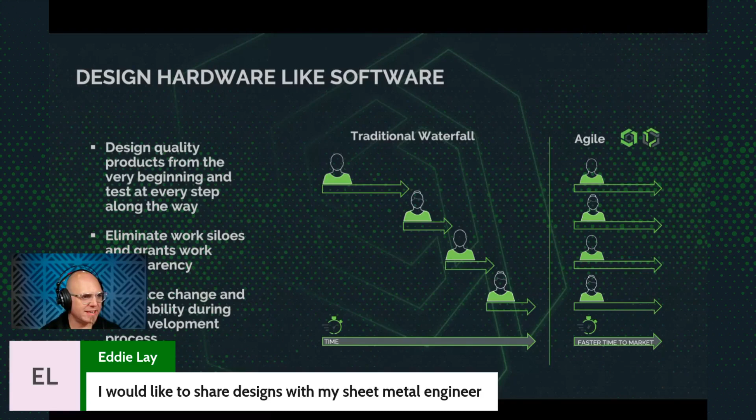So let me swap my screen here so you can see what I'm going to be talking about. One of the questions that came up just now from our new friend Eddie, who is a new Onshape user, was about sharing designs with a sheet metal engineer. These are some things that we'll answer today, and it's all related. Onshape sheet metal is very special, and we rethought how to accomplish sheet metal geometries based on how people interact with sheet metal manufacturing and OEM manufacturers, right?

If this is your first time looking at something like Onshape, I will explain it a little bit. But if you're an Onshape user, customer, longtime customer, you're going to get some good stuff out of this too. But you've probably heard this, right?

This is a trend in engineering and manufacturing: to design hardware like software, because the software industry has done a pretty decent job at keeping control over code and working in parallel paths, because software projects are very large. Think of a large application, or a fancy PlayStation video game. It's probably thousands of engineers writing code to go into those things. So they had to develop really good processes for managing parallel workflows.

Traditionally in the CAD world, it's been very difficult to do really good parallel workflows because of the way file systems are made. So we see people going from this traditional waterfall, passing a baton from one user to another to get work done, because only one person at a time can open a file in that kind of file management, right? If you've been around like me, you remember file servers and things like that. But it's becoming kind of strange to deal in that world. Most people are used to sharing online, like Google Docs and things like that.

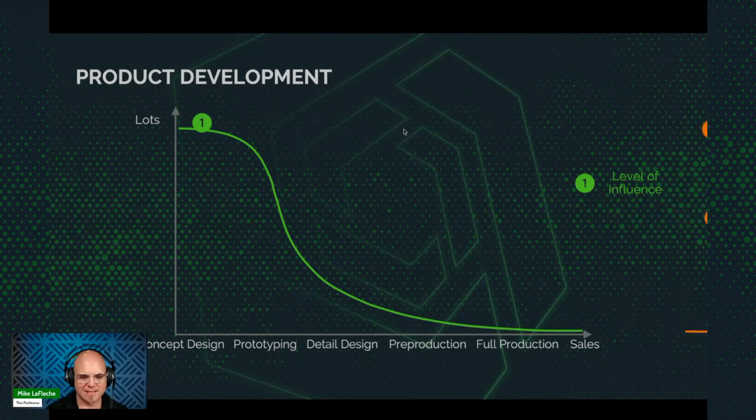That's when you as an engineer have the most influence over the design, right? But the moment it leaves your screen and is shared to somebody else, that's when the level of influence starts to wane, right? And if you find an issue, there's this metric called cost of change, and the cost of change later in the product development process, as you go from concept to prototype to pre-production to sales, gets higher and higher, right? So you want to avoid making changes past that inflection point right here.

But that inflection point is pretty far down the design cycle, right? You're finding those changes, you're making these changes in this middle section. But what if you could front load your design effort so that you'd fail fast, find problems sooner, right?

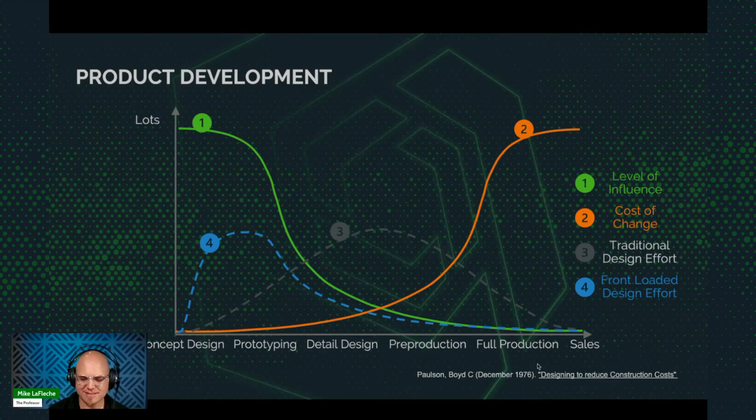And this is not a new concept. The concept of modified agile for hardware design is a new concept, but this thought train of finding problems sooner is not brand new. This is from Boyd Paulson back in December 1976, designing to reduce construction costs, and you can find that online. So how do Onshape customers produce sheet metal, right?

I'll do a quick explainer about Onshape here as I get started, and we'll get into the dirty details. There are many workflows to design products, right? I'm just picking on one for the straw man for our presentation here. There are many workflows where you could go from flat pattern to folded shape to flat pattern to get these things manufactured. But let's just pretend that I'm an OEM manufacturer producing a product.

In this case, we're going to be working on this shape here, this mobile generator chassis, which is made of many pieces of sheet metal fastened together, whether they're welded or fastened with bolts or PEM nuts or whatever it is. So as the OEM product designer making that chassis, I know a certain amount, but I don't know everything. I need to communicate with my sheet metal supplier because they have equipment.

They're going to be using certain gauge sheet metal, certain types of tooling and bend and air presses, things like that I might not be familiar with. And they might need to help me adjust my design to suit quick, accurate and cost-effective manufacturing, right? So finding that out sooner is going to be a big help. I can tell you a million stories, some personal, from my design days back in the mid 90s, when I was doing that cement mixer I was talking about.

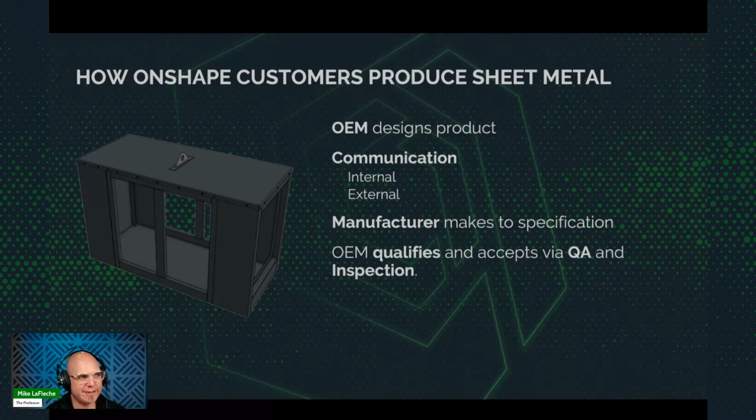So that internal and external communication, we'll talk about that. The manufacturer will then manufacture it and send it back for you to qualify through an inspection process, right? So what we're going to try to do on this chart is take that arrow and move it up, and all that movement is savings. There's other software in our product family for supply chain interaction called Arena PLM. We're not going to talk about that much today, but that's also a partner for supply chain, quality and inspection.

So let's start with Onshape and CAD, right? You're here to see a CAD demo, I'm sure, and I'm going to give you one. Know that Onshape is a full-featured CAD system with feature-based parametric modeling, similar to what you would see in Creo from PTC, SolidWorks, or Inventor from Autodesk. It's designed with that parametric way of thinking, where you put together parts and assemblies and make drawings of those parts and assemblies.

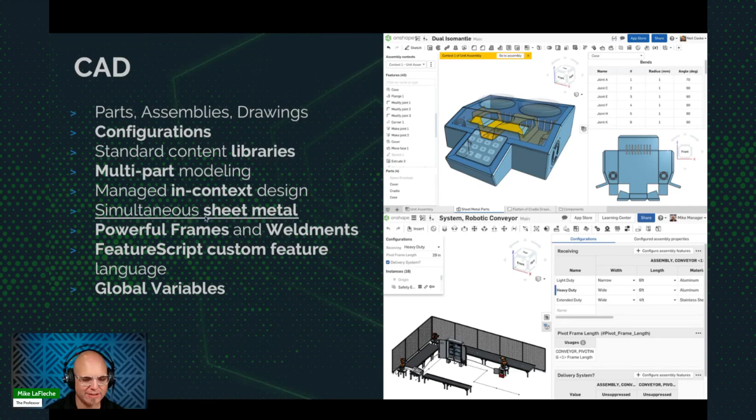Onshape can create configurable data for variant design. We have libraries, and we work with multi-part modeling, which works really well with sheet metal, frames, and weldments, and I'm going to go right into it now. So let me stop sharing that screen, and I will present another screen for you. Okay.

So here is my Onshape window, and maybe I'll just go full window here so you don't see me talking, just for a second, so you can see the full experience. I've signed into Onshape here as a user, as the manager right here. So when you sign in to Onshape, you sign in as a user. Essentially, it looks like this when you sign in. You sign in with your email address and password. Nothing to install. Full SaaS.

There's no CAD file that ever goes to your computer. You can always export data. You can release data, securely share your data, but there's nothing to install and there are no CAD files that you're managing on your computer. And that enables this finding problems sooner workflow, as you'll see. And when you work in Onshape, you create these things called documents. This is a document right here. This is not the focus of this particular webinar.

I'm going to create that mobile generator shape as you saw before, but this is an Onshape assembly made of released parts. Here is an Onshape part studio, which is the definition of the parts, right? How I'm making it, sheet metal parts, the flat patterns. You're going to see today in Onshape, this is why we call it simultaneous sheet metal. And I'm going to explain our thought process as to why we did it this way. But this hinge, for example, is made of several parts, 8 parts, as you can see right here in this one feature tree with 63 features.

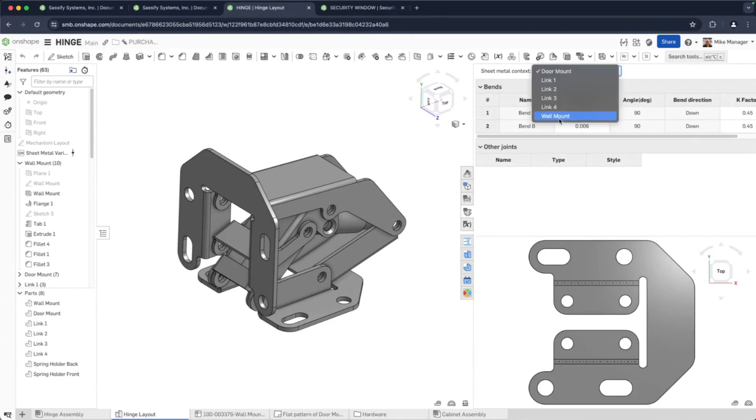So think about that. If you've come from another CAD system like SolidWorks or something like that, we have a feature tree, and all those features are creating 8 parts. I didn't have to save those out as separate files and manage and juggle file references. Here are the flat patterns for each of the components, as well as a bend table showing you the bend calculation and the bend radius as well.

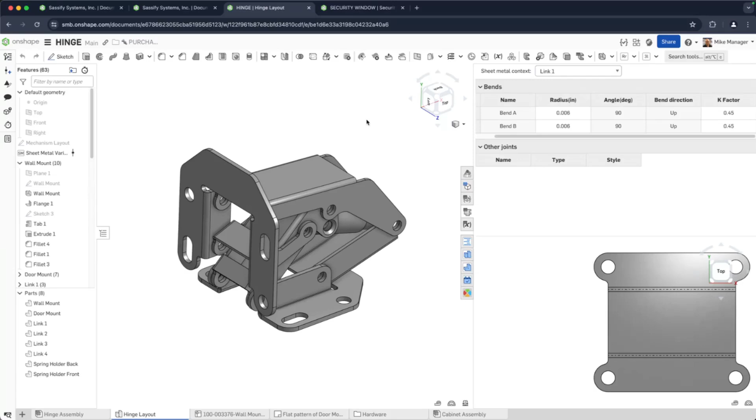So this is simultaneous because you're seeing 3 views of the Onshape data, the flat, folded, and bend table state in 3D. As you make changes, it changes in all the places. And of course, you'd be able to export that for manufacturing as a DXF with the naming that you're looking for. And I'll talk about this as we go forward. So this is just a little preview. All right.

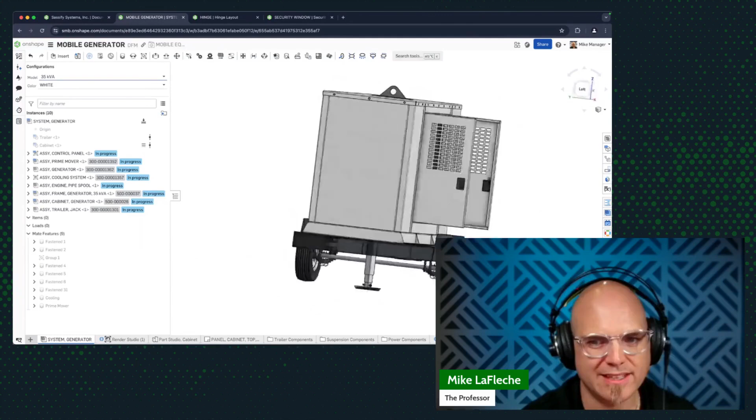So let's get into how we would construct this mobile generator right here. And I'm going to pop this open right now from scratch. It's a full product. I'm going to open it at a certain configurable size, right? This is an Onshape assembly with configuration data. And this is something I just kind of measured up, one of these mobile generators that you'd see at a construction site or something like that. There's a nice chassis frame here, but of course I saw a whole bunch of sheet metal on this and I thought it would be a great example to show how the Onshape sheet metal works.

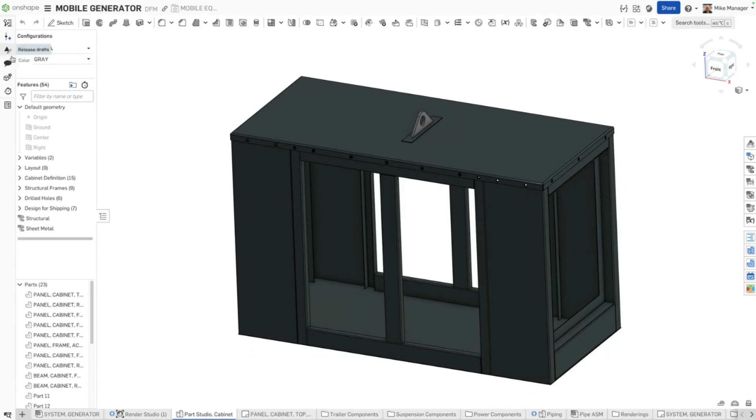So let me just go back to full screen here, so we get the biggest window possible. So when we look at this design, there's a lot of parts that interact with one another here in Onshape, right? In the CAD model. So wouldn't it be nice if we could design these parts together in a way that's performant and works for downstream operations, okay? So if we go to what we call a part studio, you can see this cabinet. I have 54 features and 23 parts.

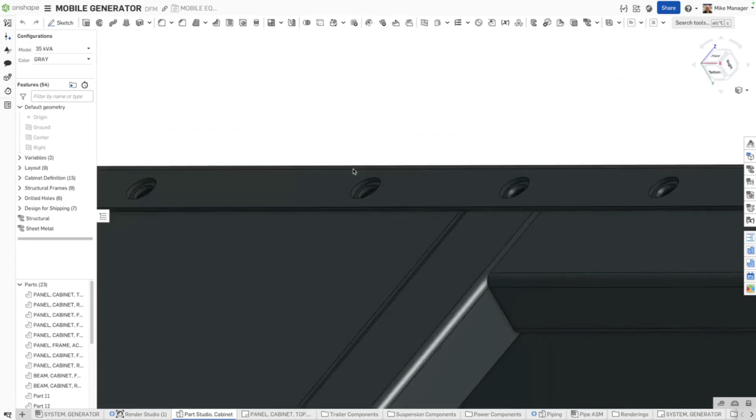This is probably the upper limit of what I would do in a single part studio for constructing a whole bunch of parts. And it's because these are the parts that are related. I'm designing them together because they're just like peanut butter and jelly. They need to go together. They need to be designed together, work together. There's going to be some holes, like some counterbored holes in here that go through here. All right. So let's try building something like this.

And I'm not going to do the whole thing here in one session, but I want to give you my thought process on how to build something like this and how I would go about doing this. And the first thing I would do is to create a layout like this. And I'm going to start in a brand new document.

I'll get out of full screen here. I'm just in Chrome here in my browser, and I'm going to hit the Onshape logo holding the Command key because I'm on a Mac. But if you were on a Windows machine, you could hit the Control key. That brings me right back to my main page, and I'm going to create something called a new document. And I'll just call it the chassis, right?

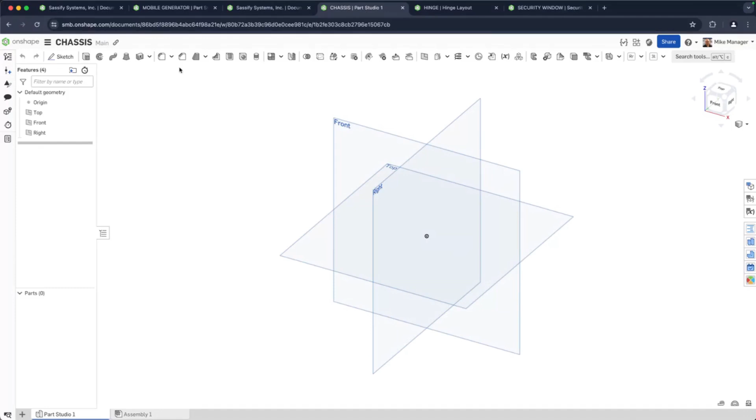So you see right away, I have a brand new blank document. It doesn't ask me if it's a sheet metal part or a weld or assembly or anything. It's giving you a Part Studio and an assembly and a document that you can start with. I start with the Part Studio, I sketch a shape out, right? And I give it the size.

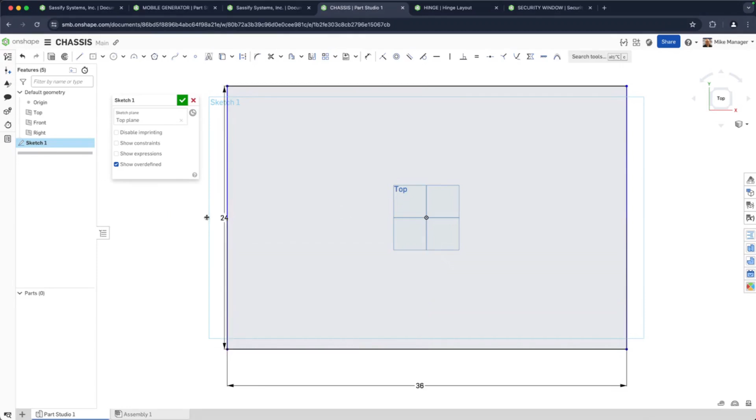How big is this? I'm going to say it's 3 feet in that direction and 2 feet in that direction. It's units aware, of course. You can type in those units. I'm working in millimeters, so I'll just switch that to inches just for this. And if I went back into that sketch, you'd see it's 36 by 24, right? So we have this basic shape here in place. It's a parametric sketch. We could locate the center of that right on the origin, and I have a shape.

And how should I make this, right? That's the next thing that I want to do. There's several ways of working in sheet metal in Onshape. And the first thing I'm going to ask myself here is, should I make it with the extrude feature, convert, or thicken feature? So I'm taking almost a fourth approach here. Let me just start basic, right?

Here are the sheet metal tools in Onshape, right here. And the first button is where you start. You tell it that you want to create a sheet metal model. And this is the question: extrude, convert, or thicken, right? What convert does is it takes an existing solid body and it will help you find all the faces. Great for complex shapes.

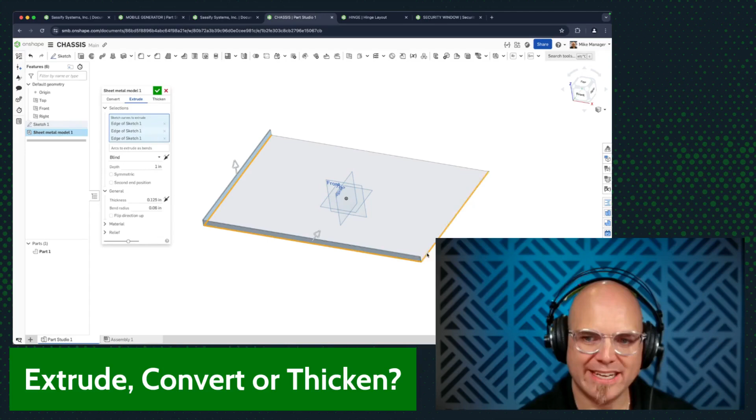Extrude is kind of like the traditional method if you've used any other kind of CAD that has sheet metal in it. You can see that I just picked 3 edges and I just pulled that out, right there at 1 inch. It's asking for a bend radius and a thickness for the material gauge, and the bend radius for your tooling equipment. The thicken option is like taking any face and thickening it. So you can see I'm just taking that flat and thickening it to the thickness.

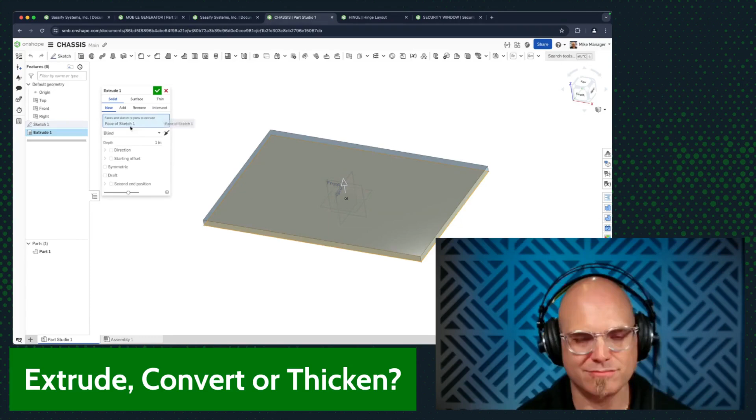The way I'm going to go about this is, if you remember back on this generator right here, we have all these different parts coming into it. I could actually kind of paint on some sketches on here. So let's just go back to that chassis, and I'll just do a normal extrusion like you would find in any other CAD. I'll just do a 24-inch box for the height. And this part right here was generated, and I'm going to call that the reference, just to know that I'm not really going to use this as a full part, but I have this shape as a reference.

And remember, I have those doors and other things I want to kind of peel off. So I'm going to draw a line here, right? And I need to dimension it, so I'll hit the letter D on my keyboard and say it's a 2-inch offset that I'm going to have that goes around this part. And then maybe I know I have a rectangular shape, something like this. I could always center these things too. So there's that center point right here. If I wanted to utilize that, I might just drop in a center line.

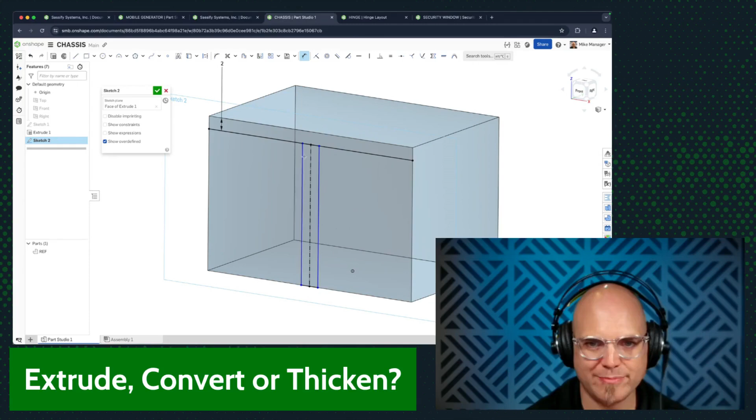Onshape has a keyboard shortcut. So I'm just going to hit the letter Q to turn that into a center line. And then I'm going to make these symmetrical. And there's the letter S on your keyboard. This is a pop-up toolbar, so I have a bunch of my shortcuts on that S key, so I can just quickly get to that. So I'll go to that shortcut toolbar quite a bit. So if you see that pop up, I'm just hitting the letter S on my keyboard. All right, so you see I'm starting to build out a sketch of the front, and I'm just going to rename it front.

So I have the extrude, I have the front. Now what, right? Now, I know that I have a cutout here, cutout here. You see it's highlighting these regions for me automatically. So now I have places where I can start making sheet metal parts. I'll do a sheet metal model on the top, and I will thicken that top shape. You can tell if you want to go up or down, right? And I'll take 1/8 of an inch. Now, I'm going to call this out. It's kind of a controversial thing. Let me just hide my video here so you can see what I'm showing you a little bit better.

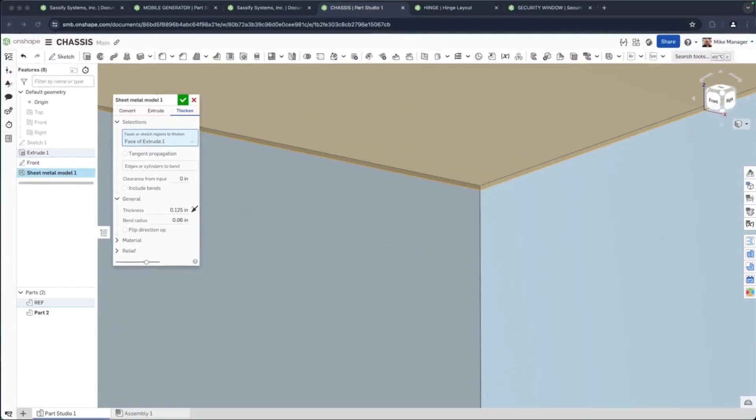And if we zoom in over here, to this area here, you can see it's flipping up and down. And this thickness right here, that's the gauge that you're going to buy from the sheet metal materials supplier.

Dirty secret about materials around the world in supplies: your 9-gauge aluminum sheet metal might not be the exact same thickness from one vendor to another and from one region to another. So these are things that you have to kind of pay attention to in sheet metal design. I've hit this quite a few times over the years.

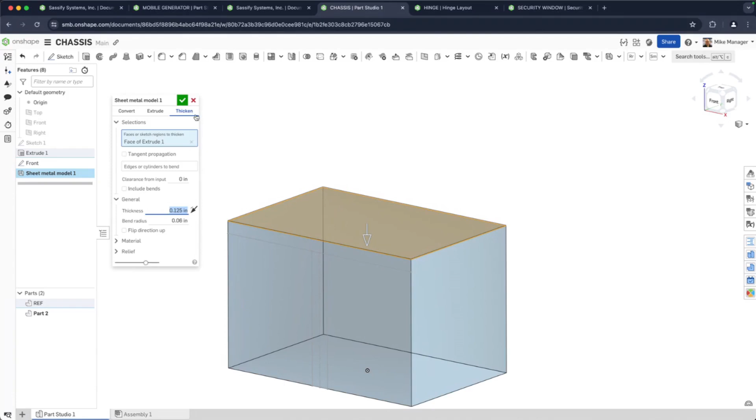So you can obviously type in a number, or you can create a list of numbers that you can reference in the future. We have variables in Onshape where you can have various values that you could draw from. Toward the end of the live event, I'm going to show you that because it's just a slight customization tweak, and I don't want to derail the demo here. But just know that. I know some people are thinking that right now if you're a sheet metal person.

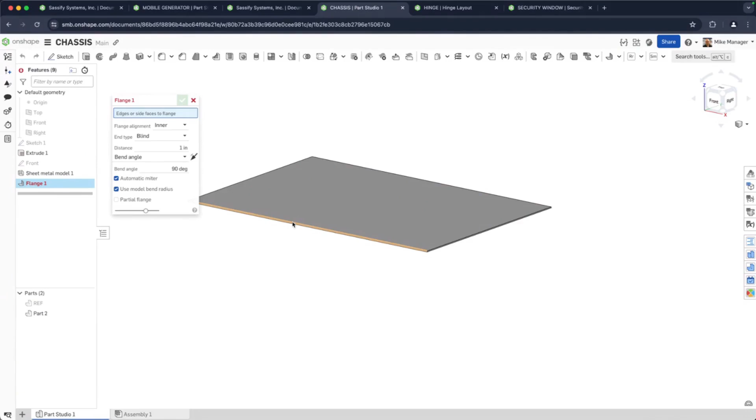All right, so I have that first piece, and there's part 2 right there. Let me just hide the reference for a second. I'll hide this sketch just to show this in isolation. Because the next thing I want to show is a flange flapping over all the edges of the top of this, right? So I'm just grabbing the edges. And you can see what it's doing. It's pulling them to the outside.

You have all the options for where the bend should come from, how it's aligned, right? So there's choices there for you. Do you want it to be a blind extrusion to a certain depth, like 1 inch, or do you want it to go up to some reference? I'm going to say up to entity and pick that point of the sketch. So just like that, I have a flange going all the way around.

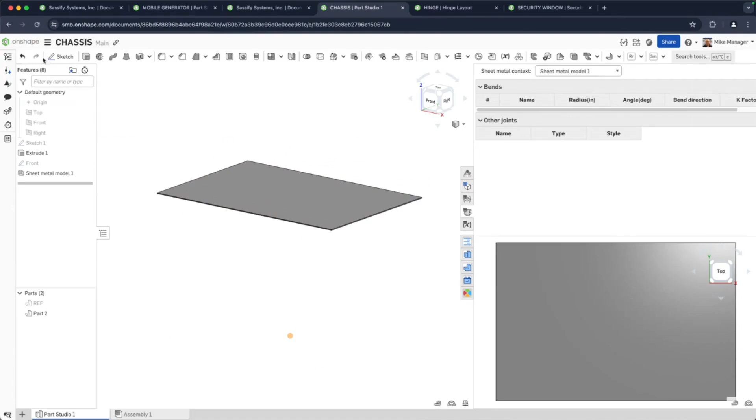Now, if we look at this, we're going to see some new buttons appear on the side, right? If I cancel, well, it's already been there because I had one sheet metal feature already. You can see it's just a flat plate right there. But let's put that flange on again. 1, 2, 3, 4. You notice it doesn't really matter which edge I pick. Onshape will know to grab the right piece, and it's showing me the flange as well as the bend relief at the same time. If there was a bend relief, it's showing you how it's tearing, right?

Now, where is that information coming from? It's coming from the brain of the sheet metal model. I call it a brain, but this first sheet metal feature, you have one for every part. This sheet metal feature called sheet metal model 1 in the feature tree is how it's going to default to its conditions, right? Bend radius, thickness. That's why it didn't ask me for the bend radius or thickness in the flange. It's defaulting to that, of course.

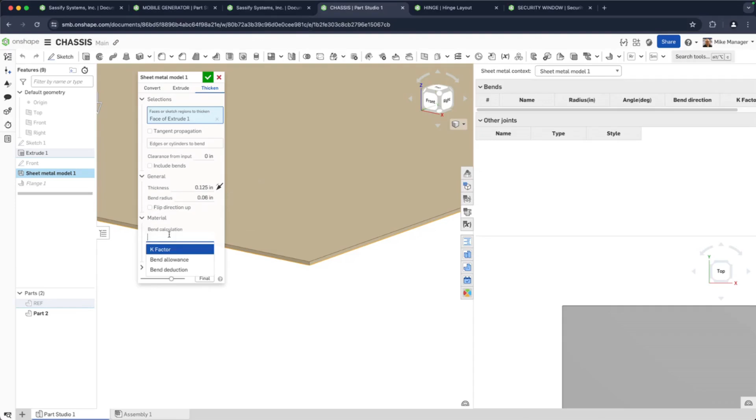Material is being calculated using the K factor, right? So how do you declare this in your sheet metal parts? K factor is a common calculation for figuring out what the material will be after the material stretches and bends through the sheet metal process. But bend allowance and bend deduction, you can also calculate in a similar way. So there's 3 different types of calculation methods, and there's a 4th that I'm going to show later as well, which is a customization that you can add to the system.

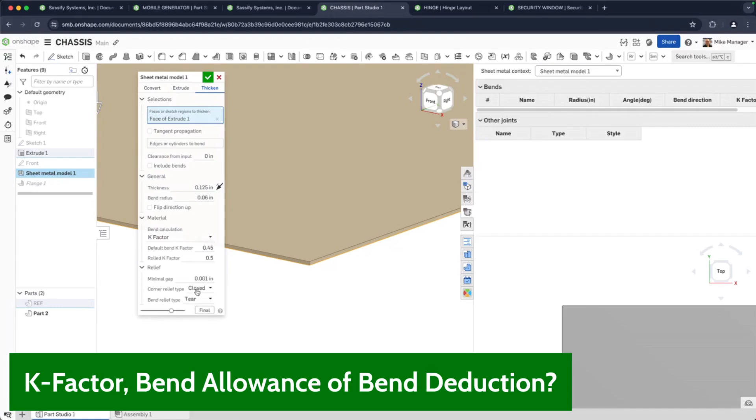And here are the reliefs, right? So if I hit the final button, it's going to roll through the whole feature tree. It's showing me the relief being a tear, but this is where you would change your relief if you wanted like a round, some sort of corner in here. If you're using punches to make your corners, you can actually see that in the flat pattern. So you're getting a high fidelity flat pattern when you're using Onshape. Let me just go back to simple corner. Or, yeah, we'll do a closed corner. There we are.

All right, so you have those options. And notice this sheet metal table and flat view that I'm working on right now. This table view and this flat view are all live. We're not flipping back and forth between a flat and folded state. And that's really important to understand, because this means you don't need to put fold and unfold operations manually in your tree if you want to do something with the flat pattern versus the folded shape.

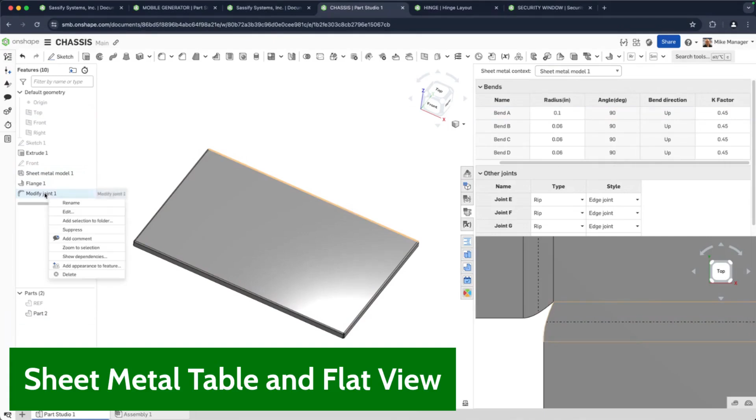It also allows you to see everything and even edit things in a tabular fashion when you learn from your supplier what bend radius they can support, what K factor they can work with, right? So this is all editable. If I wanted to go to bend A and change that to a different bend radius, you can see that I've just done that. The bend radius here is highlighted. It even added a modify joint feature in the tree as soon as I changed that radius. Now, if I want to get rid of that, I can just delete that.

So it's almost like a funhouse mirror. That's how it was described to me the first time I saw this. It's like you're just looking at the data in different states, but it's all live, okay? So this is really helpful once you start communicating with your manufacturer. In fact, maybe we should do that now.

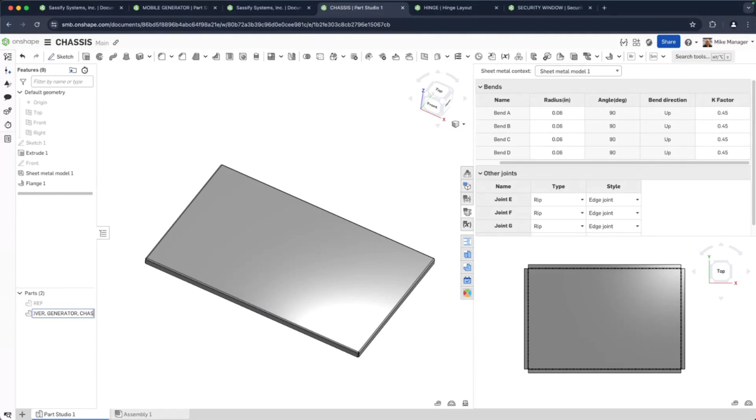So how would you communicate this information to a sheet metal supplier in a file-based world? You would save the file, you would name it. Now, I'm going to name it cover generator chassis. So that's the name of that body that I'm working with. And it's not just a body, it's a real part in the Onshape database because I can use this in drawings and in assemblies already without doing anything special. Create drawing, right? So I probably want to create a quick detailed drawing of this cover.

I'm going to go back to the model and add a comment to this. I'll just turn off the flat pattern so we have more room here. I want to share this information with my sheet metal vendor so that they can comment on this with me. I'm going to bring up the comment panel. Just like any modern SaaS system, you can label the person's name that you want to share with. This person could be a view-only user. They don't need to be a full CAD person. So licensing is simple here.

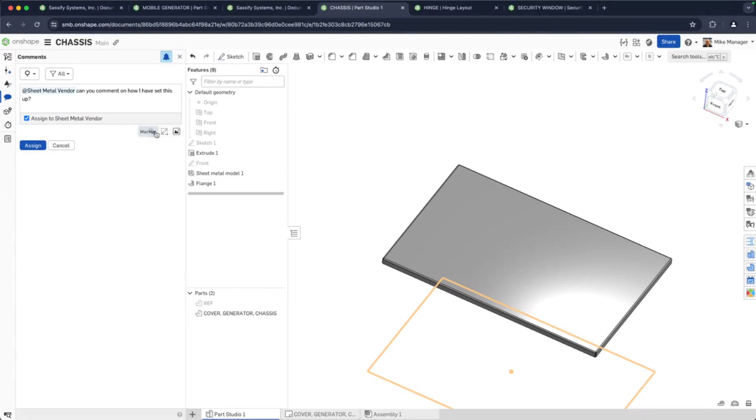And I'm going to say, hey, sheet metal vendor, can you comment on how I have set this up? And I can assign that to the vendor. I can even add a little markup. I can even tag entities, like if I wanted to ask them about that particular bend: is this bend radius okay? And I assign that task to the sheet metal vendor. That vendor does not need to be a full CAD user using Onshape. They could just be a view-only person. They could be a CAD user as well, and they should be if they're doing their own work. But I will share with that vendor.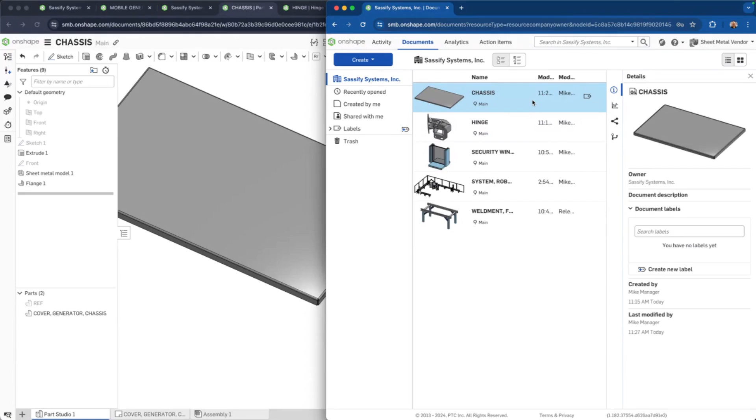And how does this look? Let's just make my window a little smaller here, and I will sign in as the sheet metal vendor in the blue window. On the greenish window, I have Mike the manager at the OEM company, and I have the sheet metal vendor. Look what's already in their list of documents. They've been shared into the chassis and they can see it and jump in. They were getting emails noting this. If they were on their phone, they probably got a notification. Notice what's down here, the comment button.

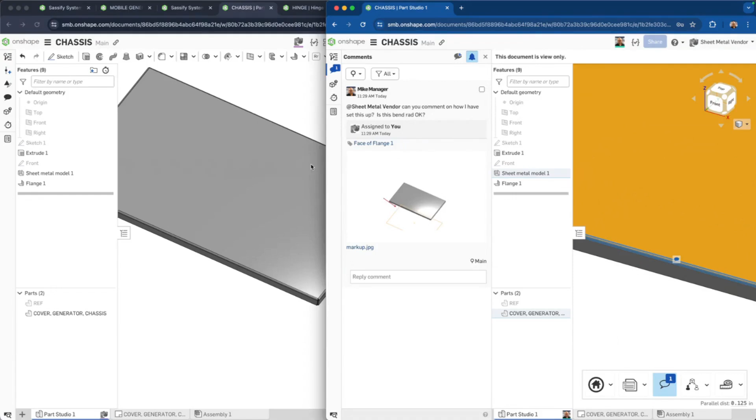And there we are. Comment right there. I can reply. Now, let me zoom in here as the sheet metal vendor and I'll just go full screen here so you can see a little easier. They can see that radius on that flange being highlighted. Even though they've been shared in, I could double click. Let's see. Oh, it's view only.

Let's do this. There's the comment. Let's do a measurement. I'll just pick that face and hit the tape measure. Well, there it is. The radius 0.185 inches. So they can reply. I can do 0.175 on the radius. Is that okay?

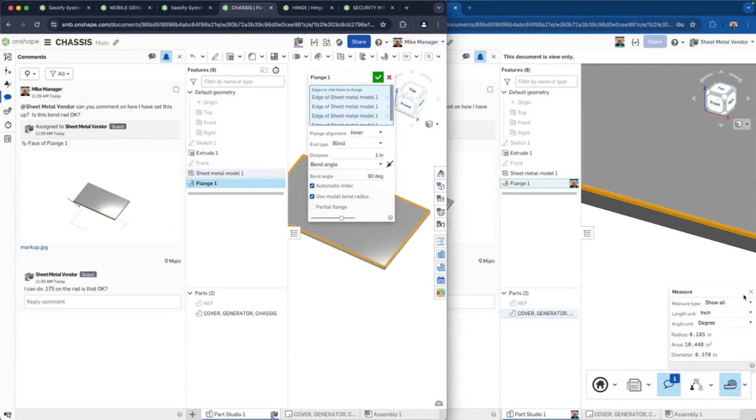Right? And of course, back over here, there's a comment. You see a little bubble right here that popped open. There it is. I can see the reply. And maybe that's okay, right? Maybe I can go back over here, change it to, let's see, 175 on that. Oh, 185. What am I picking? Maybe I'm losing my mind here. Oh, I was picking the outside radius. There we are.

There's the actual radius, 60 right there. So you can see why, attention to detail. So I'll just go 90. Just make it bigger, just so you can see something change. And that change happened for both people at the same time. So sorry for the windows here, but you can see if I were to measure over here, that's now 90 automatically on the sheet metal vendor side, right? That is pretty cool because we did not need to share files back and forth.

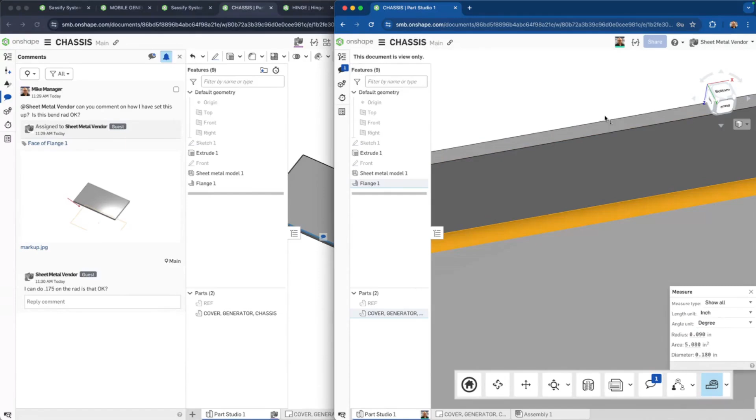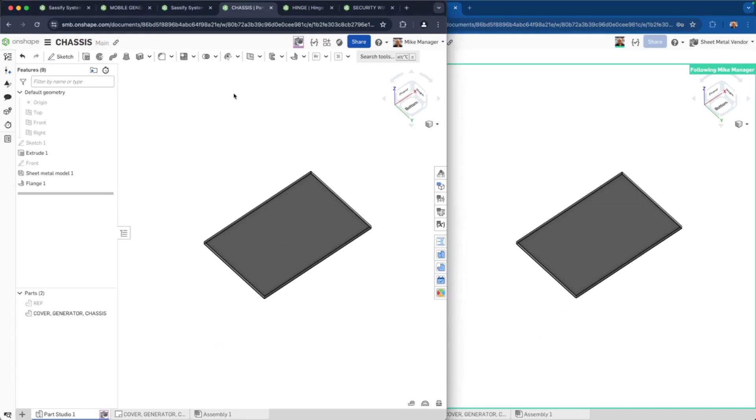In fact, we can even see that Mike, the sheet metal vendor, is in the same document at once. I can double click on Mike as the sheet metal vendor, and anything that Mike does on the screen can then be shown as a live design review. So you're bringing in your supplier sooner. You're getting answers to questions early while you have the most influence on your design, right? Well, let's go forward. Let's continue the design process with the sheet metal vendor still having access to this. So they can see everything that's happening as I'm working because I've shared them in.

Now, if I wanted to kick them out, I could, right? I can just kick them out like that. And then over here, if I refresh this window, you see, they can't even see the document anymore. It's gone. Completely gone, right? That's what Onshape is like. You have full unfettered control and access to the design.

Your horse is never out of the barn when using Onshape, because when you send a file with a file-based CAD system, that file's gone, right? You can't get that back. A copy of that file's on another person's computer. Things can happen. With Onshape, you have restricted control, encrypted communication, and full control over who can do what and when.

Now, of course, I can add the sheet metal vendor back in. Maybe I even want to give them edit rights because they have an Onshape account too, professional or enterprise in this case. So I can tell them what they can do. They can't export, or maybe I'll let them export, but not share. They might want the flat pattern DXF, right?

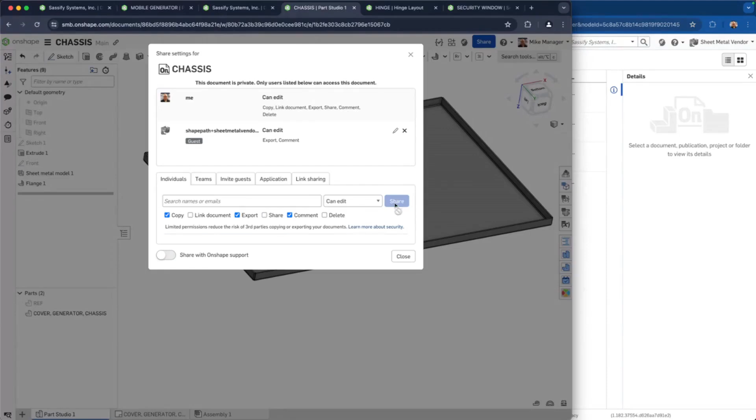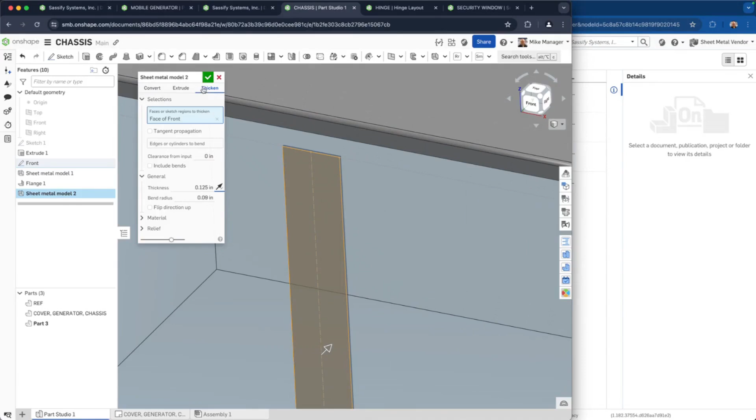All right. So we have that shape. Now I'll keep on going. We have that reference shape that was here to help us. We have that front panel right here. Maybe I'm going to thicken this piece right here. So I can pick that face, thicken that, pick the direction I want to go in, and continue forward. And that's another set of rules for that. It's another part.

Power tip for existing Onshape users. Every time you create a new piece of sheet metal, it shows up in this list for the flat patterns right here. If you rename these to something more meaningful, then it makes a lot more sense, right? If I take the feature and rename that to what it is, it shows up over here. Okay, so it's very easy to see. All right, we'll keep on going.

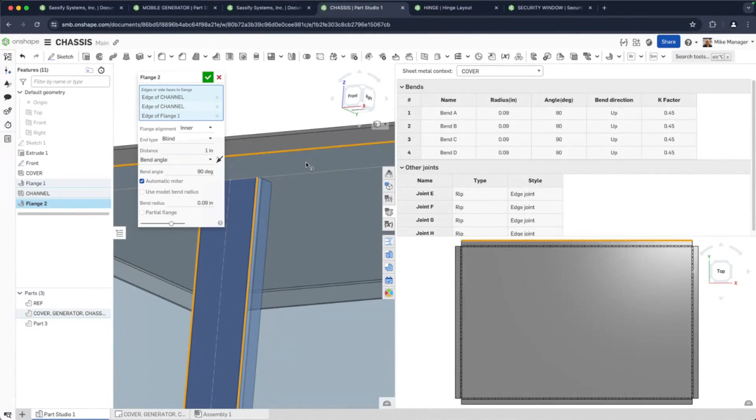Flanges can work across multiple parts, by the way. So if I pick this edge and this edge for a flange, I could have also picked a part from another piece as well. It's even highlighting it in the flat pattern right there. So just know that that's not a limitation in Onshape whatsoever. You can add features to more than one part at once. Sometimes that's really helpful to establish the nice parametric definition of it.

So when you're adding your flanges, hems, tabs, they're inherently multi-part, especially tabs, right? So we have flanges, hems, and tabs. Hem is essentially, let me just get rid of that other piece.

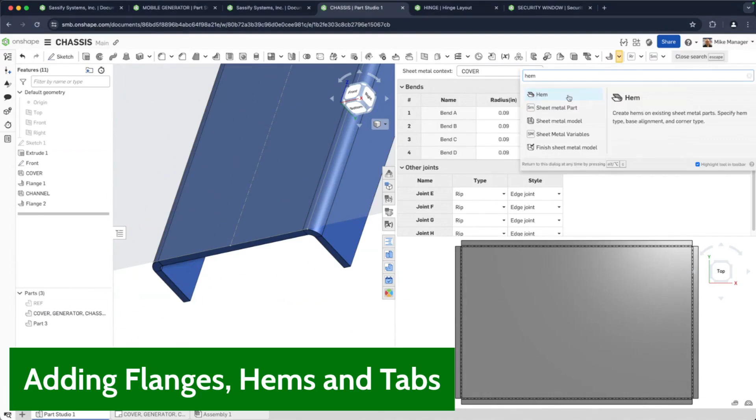If you take a look at a hem, you'll probably know what I mean once I show it to you here, or you probably already know what I mean. There's a hem. And we can fold that over, right? And that's a little too big. We'll just say 1/2 inch. There we are, just fold it right over. But there's different types, rolled hems for like a piano hinge or a teardrop style as well. So all that's here in the system.

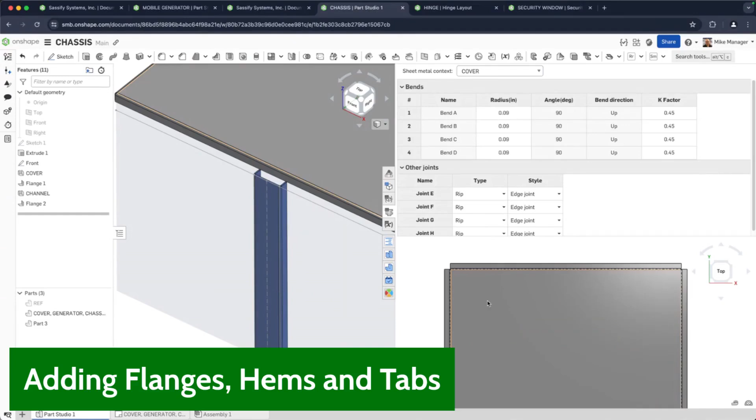You can also draw in the flat view as well. And I'm going to get into sketched bends here in just a second. But in this case, I want to draw a rectangle from the center of this corner out here at 5 by 5. And guess what? I can make a cut right there. It's going to remove the material just like that.

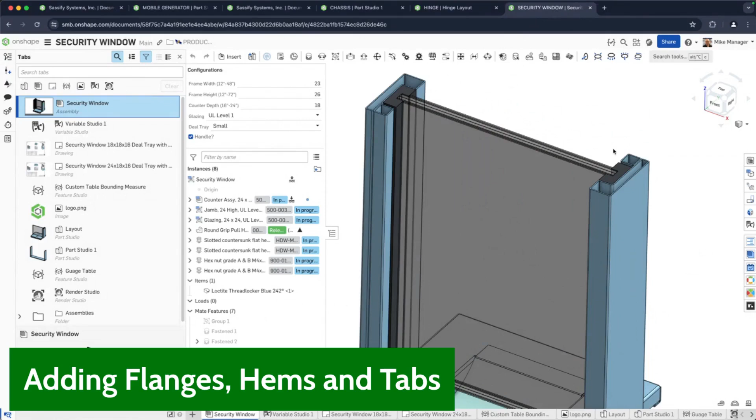So sometimes it's easier to do it in flat pattern versus the folded shape, especially when you have curved kind of geometries. If you have a complex set of conditions, all these parts interacting, working together, or a consumer product where you have a bunch of sheet metal working together and you want it to cut in a certain way in its folded state, that is where you'd want to cut across a bend. Let's go back to the chassis workspace that I'm in.

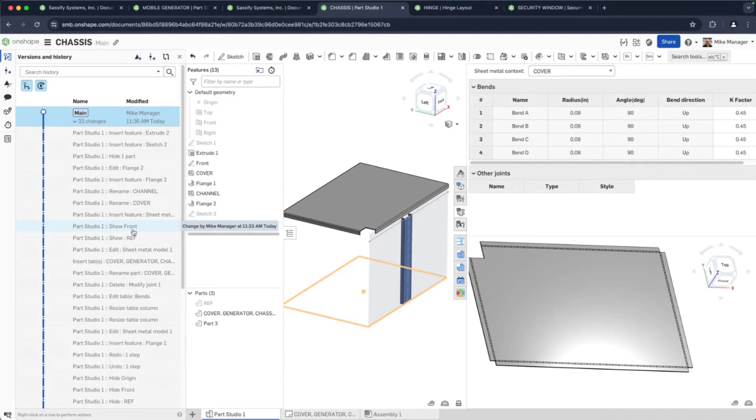All right. I'm going to take a little time out here before I get into sketch bends because you're probably nervous as heck because you haven't seen me hit the save button yet. But if you've seen Onshape or used Onshape, there isn't one. There is no need for one. Onshape records every single operation in your design. Here is a full list of who did what and when in the design. Now I said who did what and when. It's just been Mike doing the work right now. But you can see the whole list of features of who made the changes.

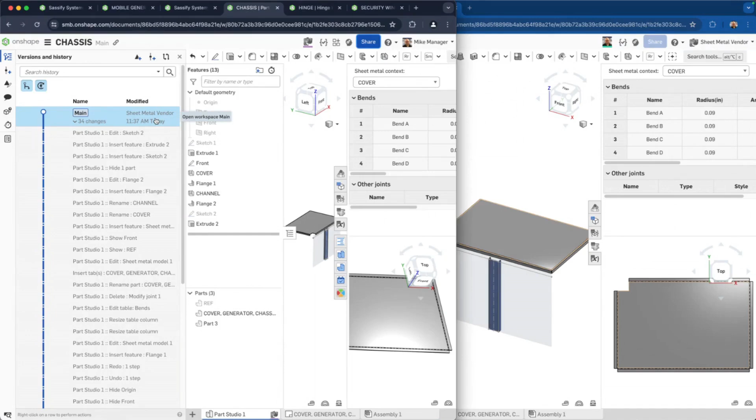In fact, if I did share with the sheet metal vendor with edit, there's the chassis for the sheet metal vendor to look at, and the sheet metal vendor can actually go in. And because I gave that sheet metal person edit rights, they could make that change, right? And of course, I would see that change right there immediately. The sheet metal vendor made that change. I know it happened. But I could restore back before that change happened, right? We have full history of the entire design. And we can label versions in time.

And in fact, branch as well. Try out different ideas. Maybe I want to do a DFM study on this, right? You branch off, you find your branch, you do your work, and you're working on a branch. And the sheet metal vendor can work on that branch, right?

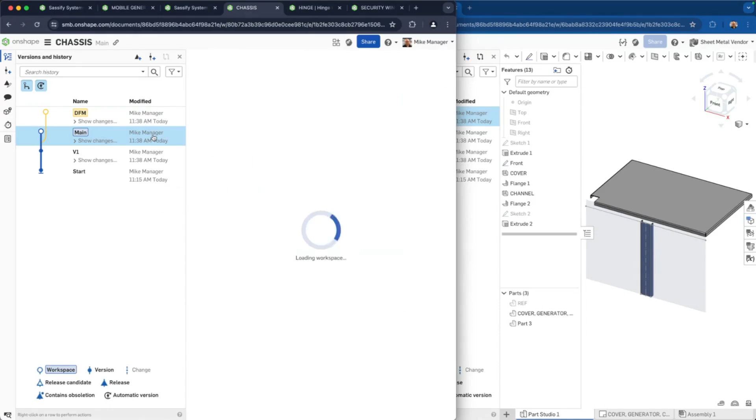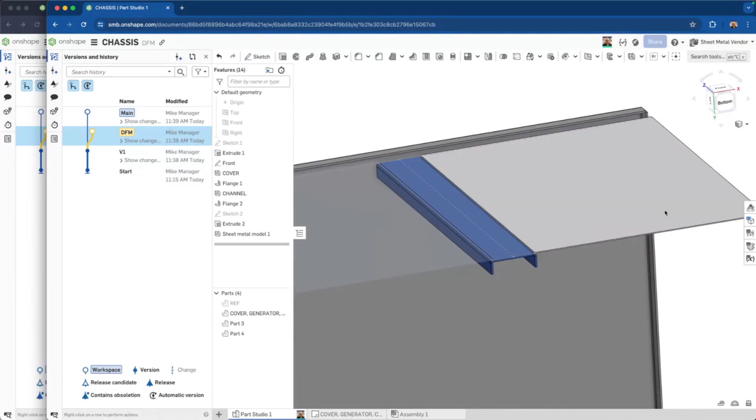So let's experiment with that. We're both on this DFM branch. And let's add some more things. And we'll just pull out another piece of material here. There we are. In this one, I'm going to sketch a bend on here, just to answer that question. So you can draw a bend in place. So I'm just going to peel that corner back. And there's the bend operation right there. My bend line is here. And of course, it's showing you the fold in place, and then you would just tell it what your angle is.

So a common workflow, if you're dealing with any kind of fold like that, that's how you would do it, just a straight line, right?

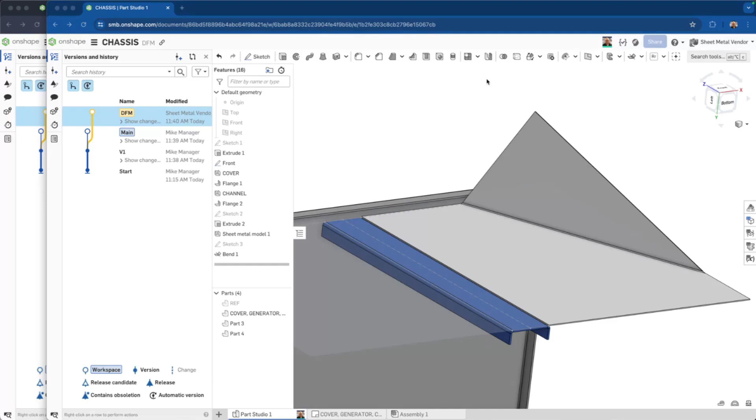There's a few questions that I'm noticing coming up. I've been flying around through the system here, and hem. One question from Jessica is about a hem on a circular profile. I don't think that's gonna be a thing here, because it would need an advanced forming tool to create a hem on a circular edge. So we only support hems on straight edges currently. But thank you for the question.

All right, let's keep on going. Next up. So that's a sketch bend. Just know that you can do that. How do you get to manufacturing is going to be the next kind of thing. And can you use the hole feature on a flat pattern?

Oh, that's a good question. I think you would probably do it. Yeah, because right now in the flat pattern, it's sketched shapes, right? You can sketch and then extrude, right? And that's the way we can sketch on the flat pattern, but we can't put a feature, like an applied feature, on there. So I would say use the, if you wanted to put in

holes or locations, if I go back to my previous design right here that I built a little bit more fully, you can see the holes here on the part, and I put the holes in at that moment as it's been folded up. So let me just roll here. Right here are my drilled holes.

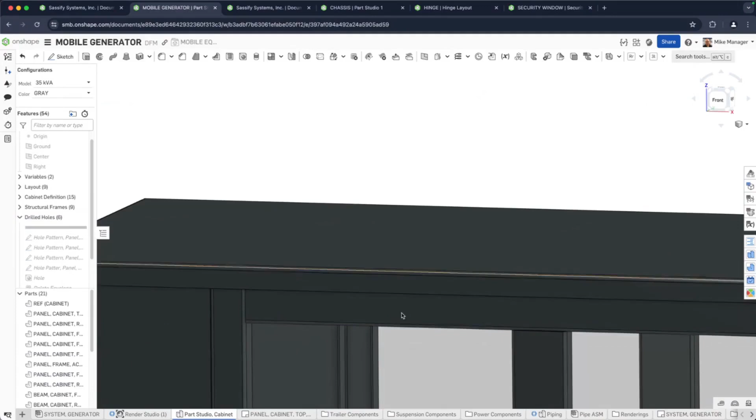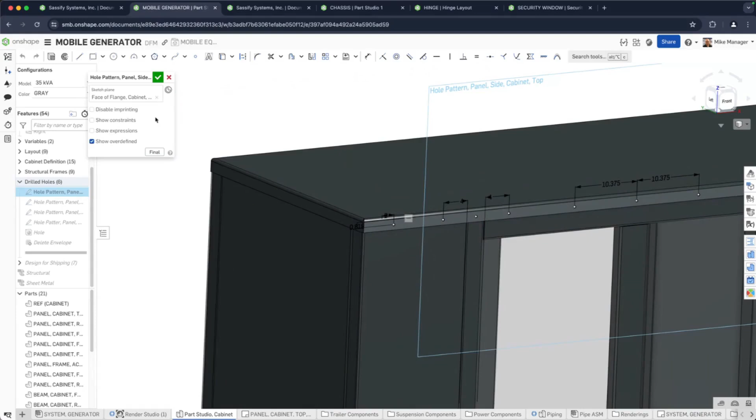Right. So what I typically do is I create the sketches right there on the folded shape. And the reason I did it here was because I'm the OEM designer and I'm designing through multiple parts. But if you're just doing one sheet metal part at a time, you might not need to go to this level of thinking. But you can see I've got just a bunch of points on this. And then I have an M10 hole, countersunk hole.

And that's kind of newish for Onshape, the ability to support counterbore and countersunk holes drilling through sheet metal. So that's supported. And you can see it's drilling, it's using all the points that I wanted it to pick. And by the way, I don't have to pick every single point. I can just pick the sketches right here. So I have 4 sketches for the 4 faces that I put holes on.

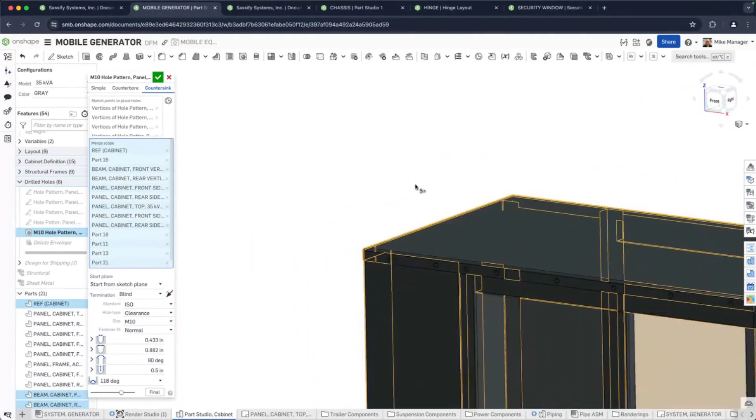And it's going to drill through all of them without me having to pick every single point, right? And I told it to drill through all the possible parts, right? So that's how I did that. But flat pattern is just sketch-based operations, if you want to sketch on the flat pattern. All right. What do I have next in my bag of tricks here?

Company-specific features. So this is something that comes up especially with a sheet metal manufacturer, right? That knows exactly what they have for materials and the equipment they have on the shop floor for the press, brake press and everything. So the way you would do that in Onshape is to create... there's a few ways of going about it, but I'm going to show you the method that I've kind of gravitated toward lately, which is to set variables that are driven by Onshape's custom programming language called FeatureScript.

So you can see here, I have a radius value and a thickness value, right? Because people call this bend tables in some other CAD software, where they'll pull in an Excel spreadsheet with their custom data. And if you pick a certain type of material with a certain gauge thickness, it's going to present to you the available bend radii for that, right?

And these are all very specific to each company that you would want to work with. So it's tough to provide that as a global kind of operation. So that's why a custom feature comes in really nice. Onshape has open sourced all of its programming language, so you can make your own features or use features that other people have built.

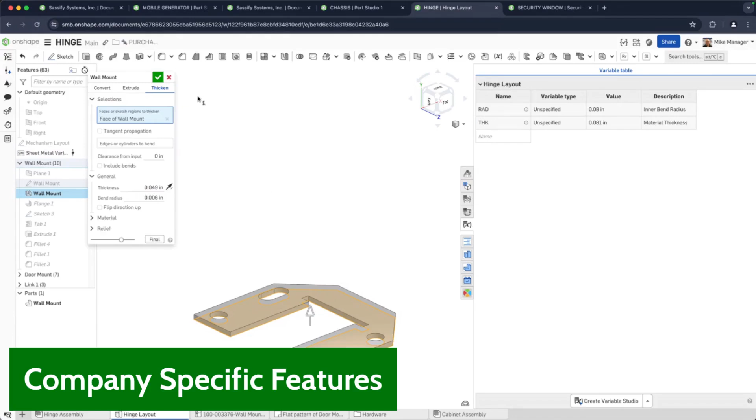In this case, instead of going into the sheet metal feature and typing in 1.25 millimeters and 0.15 millimeters of bend radius here, I could call out these variables. And by the way, variables are something that you can create on the fly or as a table, as its own tab inside of a document, right?

So here's a Variable Studio, and I could say height is going to be length, and it's going to be 45, and you can build this entire table and reference it throughout all of your designs, and it's extremely powerful. Global variables, just look it up. Variable Studios, right? But where it doesn't really help you is if you have one value kind of driven from another, right?

So let me delete that. It's already gone. Okay, good. So this feature right here, and you'll find these on the Onshape forums. The community of Onshape users is quite vibrant, and we have a very generous community that shares different ways of

doing things. And this is how I found this idea: you have aluminum or steel, right? What's your gauge? If I have 9 gauge steel, that's the bend radius I want. If I have aluminum, I have 2 options in this particular case. And where are these coming from? Well, it's coming from the original source document that has that information. So very easy, human readable here.

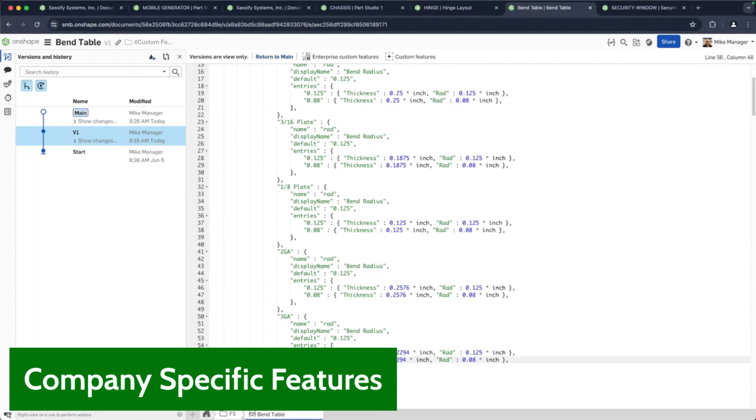But you can see 3 gauge gives me this radius and that radius, right? Pretty simple. It's not crazy stuff. So to do this, all I did was insert that feature in this design, which creates these variables. So this is like the control center for the variable. And if I go to wall mount and go to thickness, I just type in hashtag thickness, hashtag radius, right?

And now that is going to create it using that particular size, and it will stick with that. So this tab also probably needs to, I've changed something in here that affected that in a non-good way, but that's okay. I can go to the door mount here. Here's the door mount, and I could keep on doing the same thing. So you would just do that.

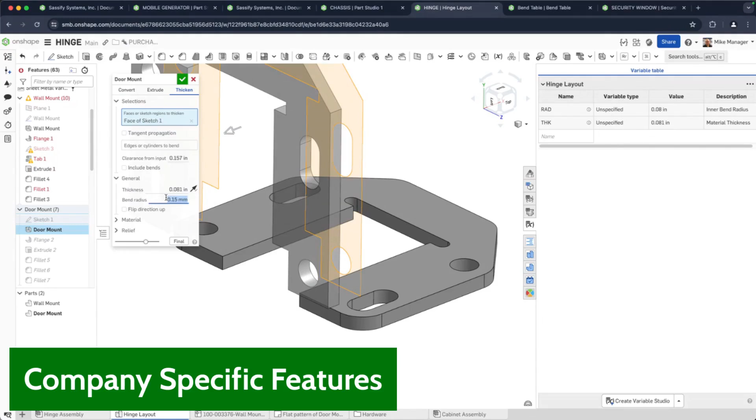You would insert that feature as the first feature of your model or wherever above the tree where you have your work happening, thickness, radius. And that's controlling all the size information going forward. And you could have different variable features for different vendors even. This vendor I work with uses this set of numbers, and this other vendor uses this set of numbers. And of course, if you are the vendor, you would have your own and work to it.

So know that you can build completely custom features within the system of Onshape. And it's very easy to add a feature like that. Here's my bag of tricks, and there's sheet metal variables. So you just hit add custom features. There's a bunch of samples in the community, and I'm going to share a link to one, and you can paste that link in the search box and it will find it. And there's some on the forums as well.

All right, let me just cough for a second. I still got some allergies.

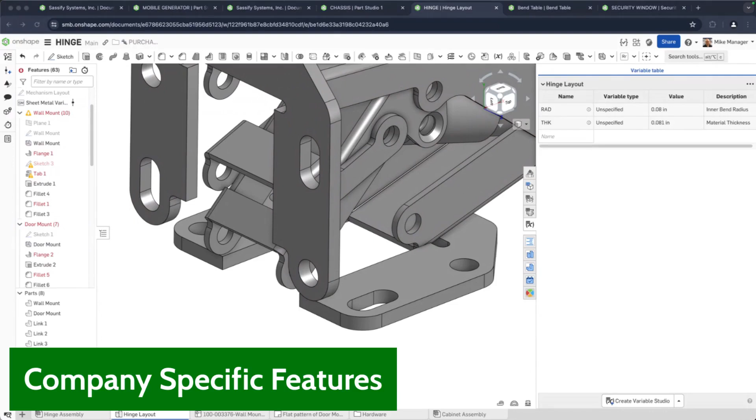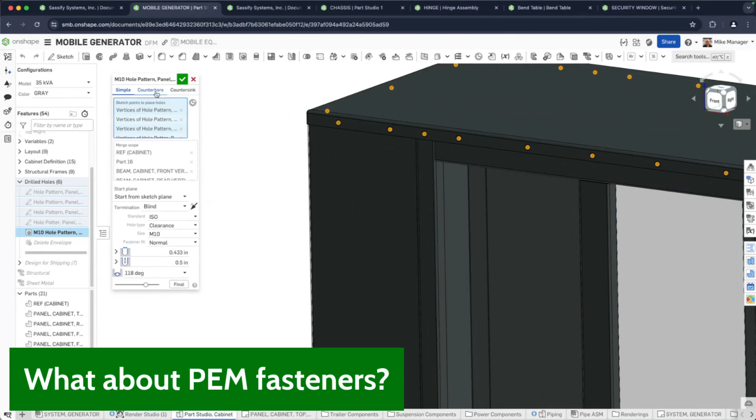All right. Some people ask about PEM fasteners. How does that get handled? If you're putting your sheet metal designs together with PEM fasteners, that would be in an assembly. I don't know if I have a good PEM fastener hole, so I'm going to make one. Right now I'm using a countersunk hole. Let me go to simple hole over here. And here's the end condition.

And what's my standard? Well, I can choose the PEM standard as the hole type when I'm designing holes. So you would just pick, I want an M10 self-clinching nut hole right there. And then what's the fastener type? Is it going to be a clearance hole? It's all set. All the numbers are defaulted, and we have the database of PEM fasteners.

Then in your assembly, you would take this. This is the part design space. I would create an assembly, which gives you your accurate bill of materials. And I'll just find the part studio for the chassis because I have a bunch of stuff in this document. There's the cabinet right there.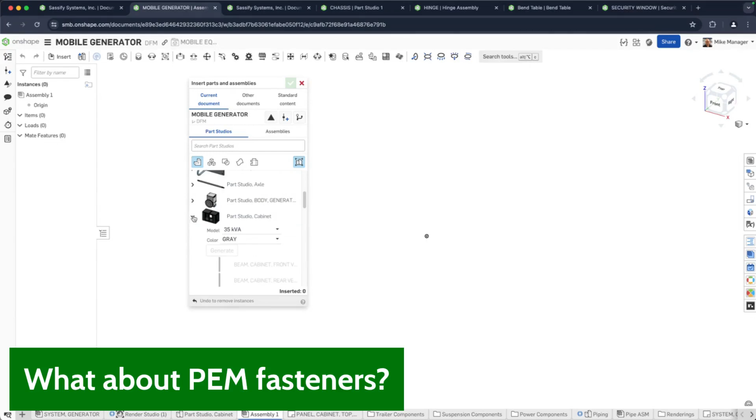Okay, and that's kind of a newish function as well, inserting the entire part studio as one collection, and it kind of stays grouped all together. We just fixed the first part in space. This is really useful for these kinds of construction scenarios where it's a fabrication and you don't have moving parts, right? It's just a bunch of fabricated items.

Oh yeah, the PEM fasteners. So how do you insert those? Well, you could insert in the same dialog, right? I inserted from this document, but I could also insert from my own library of different things that I've put together, right? Maybe I have a purchased item library. But standard content, think of this as like if you come from SolidWorks or something, this is like Toolbox, right? This is just a standard content system.

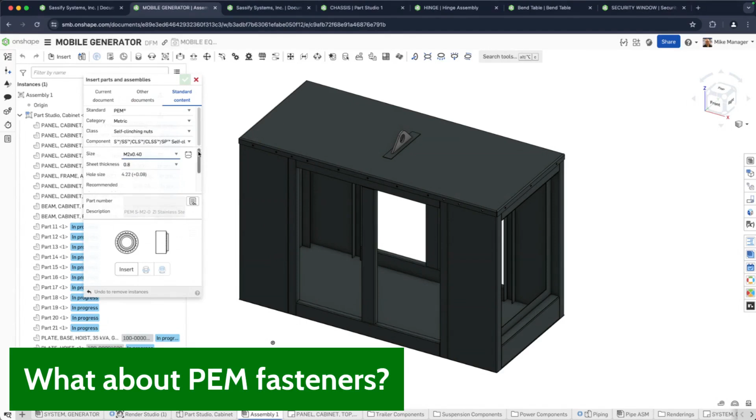So I would go into the PEM area here, and then pick my self-clinching nut here, metric, right? It was M10. There we are. That was the type. And let's say I forgot it was M10. I could auto size it based on a selection. And there it is. It just finds out that it's M10 just like that. And how many do I want? Well, I'll just pick this face.

Actually, you know what? I'm going to do one. I'm going to put it right here and insert it. Make sure it goes in the way I want. Not that you'd ever put PEM nuts on this. This is going to be a normal bolt and screw.

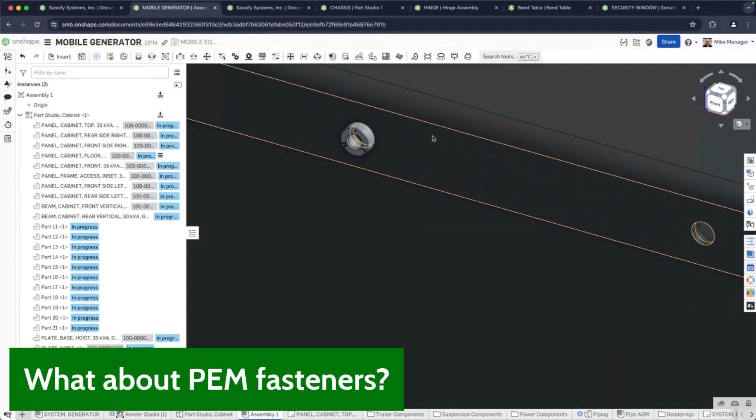I know they kicked me out of the engineering world a while ago for these kind of reasons. I'm just kidding.

But there's a PEM fastener right there. And how would I get the rest of them in there? Right? You would use the replicate function right here. Replicate that. Find any other hole in that face where it makes sense, and it just puts them in. And I can just kind of go all the way around just like that.

So this replicate function works really well, especially on imported parts. Like if you import something from a vendor online, commercial off the shelf, and you wanted to fill up a valve that you bought with all the bolts. This replicate function works better than a parametric replicate that's reading a feature, because in a commercial off the shelf item, there's not going to be a feature. You're downloading that as a STEP or whatever.

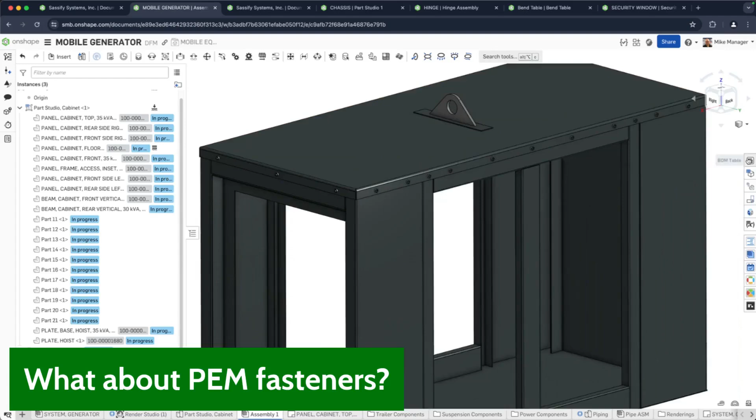All right, so that's that. And it's building up the bill of materials. By the way, the bill of materials is right here in the Onshape assembly area. It's a fully live interactive BOM, just like that, right? And of course, there's my PEM nuts right there. I have 28 of that part number.

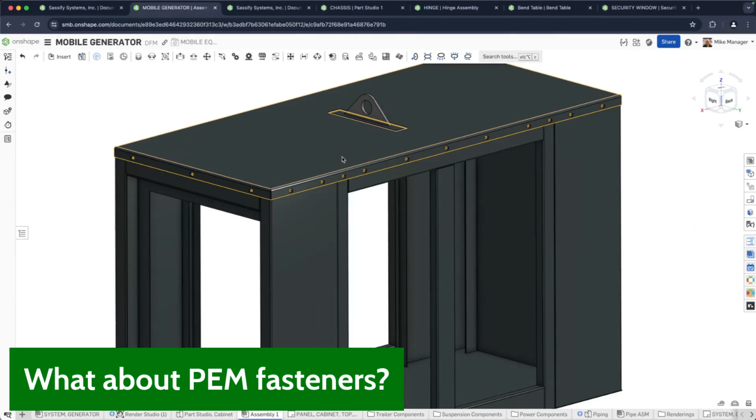Okay. All right. Time is flying, so I need to keep on going here. I did get through most of the things I really wanted to talk about, I believe. So let me just go back over here and make sure. There's definitely some other things that we can do, right?

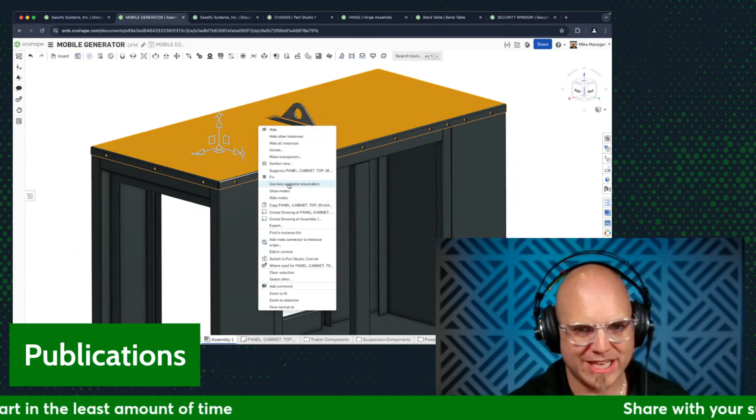But one thing that is sort of newish in Onshape is publication. So if you don't want to share the entire document out, because there's other things that are private that you don't want to get out, but you want to create a publication of just the drawing of that cover. Let's say I want to make a drawing of this cover in a flat pattern. I want to make sure you know how to do that.

I'll create a 4-view drawing on that B-size piece of paper. And this will be my legal document with the dimensions and inspection and all that. Of course, I could put a whole table on here with all the holes, but I'm just going to drop in a couple of dimensions here and drop in the flat pattern as well. And you would hit the insert button and filter it on flat patterns. And then here is my cabinet and the flat pattern for the top. There it is.

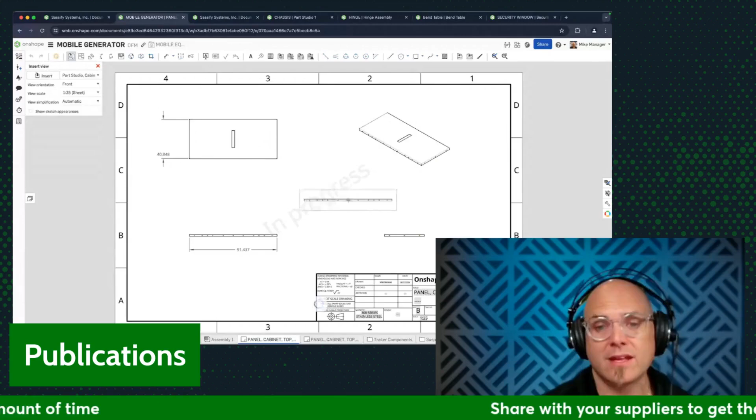You notice it's filling in all the metadata, of course, behind the scenes as well. Come on. And this isn't really the way you would do a flat pattern, because you really want to do a one-to-one flat pattern. On a drawing, you're not going to get that, especially for a part this big. So let's show you the other method.

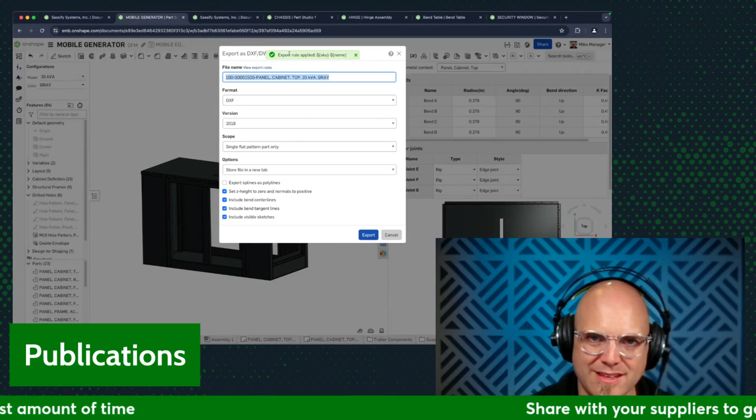If you go over here, go to the top piece right here, and I want to get the export for the DXF, I can export that as a DXF too. And look what it's nice enough to do. It's creating a file name for the DXF based on some rules. So I told it to look at the part number, because part number is a property that you can apply to anything in Onshape, as you might expect. And then I just told it to create the file name based on that.

So we have all these rules. Look up export rules in the help, and you'll find it. And I can export that as a DXF file and store it right in the document. Look at this. It just adds a tab to the document, and there's the DXF file for me to view. And you can export this PDF. You could even upgrade this DXF viewer to a full 2D editing program, like a light version of AutoCAD, if you will, to make changes.

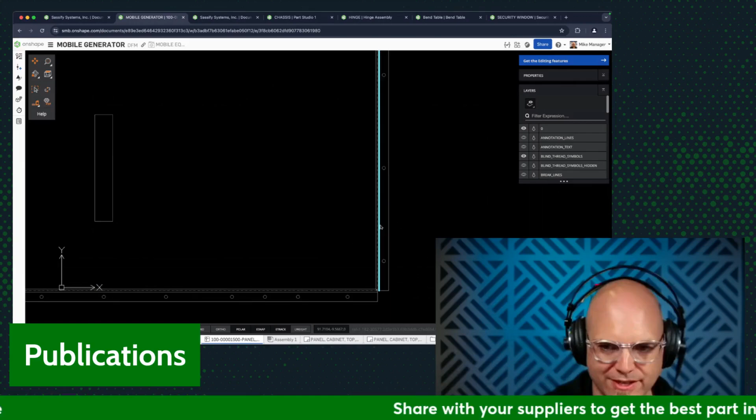A lot of vendors may have certain line types or color names that they need for their laser jet or water jet. And you can see all the layers coming through here are all configurable, so you can change that to suit your equipment's needs.

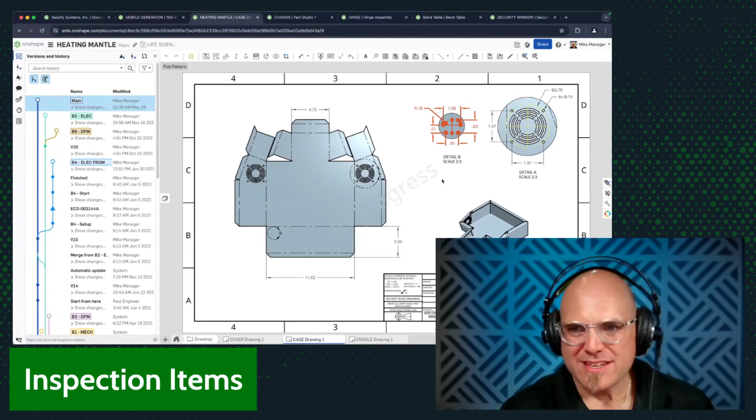Inspection as well is something that I just wanted to make sure people realize is a thing within Onshape. And let me just find a better piece of sheet metal that has a drawing on it. And I know I have it right in here. This is our old standby here, but I still like going to this drawing because it has a good story. All right. Oh, let me turn off that ticker. I think you've gotten the point that you should share with your suppliers. But I'm going to talk about inspection items right now. So, let me go to the cover here. That's a better looking one.

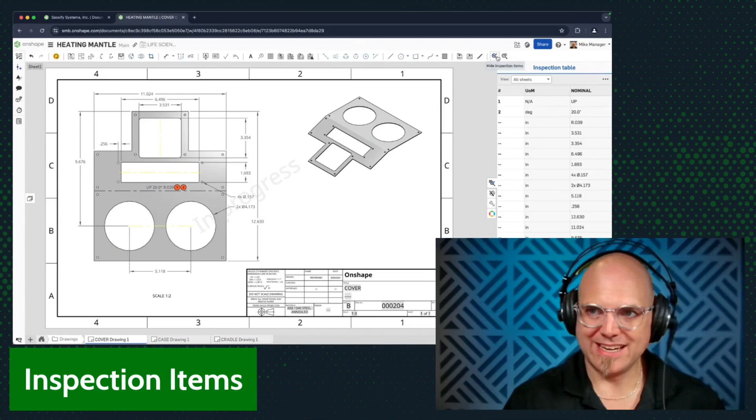So everybody in Onshape gets the ability to label an inspection item on their drawings. And what do I mean by that? So if I go over here to the inspection table in Onshape, I can assign inspection bubbles to all of these, right? I can assign them right like that. I can pick them on the fly like that. Or I can say automatic and just have it figure it out for me. So it's putting in inspection bubbles next to each dimension.

And it will calculate if I had tolerance information on here, which I don't right now, but let's put some on. So if I said I had a limit dimension of plus or minus 50 or something like that. See what it's going to do over here? It's calculating my upper and lower limits, just like that. So for incoming inspection, if you're getting parts in from your supplier, you can very easily create a report, export this as a CSV file, slice and dice that in Excel, Google Sheets, whatever, and have your incoming inspection process be taken care of as well. So that's just part of the Onshape system. I encourage you to check that out.

So what you've seen here is a lot of stuff, but it's certainly not everything about Onshape. It's just the way I would think about doing sheet metal in Onshape. Hopefully you were able to step into my thought process and understand a little bit more. I really hope you got a lot out of this. I didn't expect it to go right to the top of the hour, but there's just a lot to talk about.